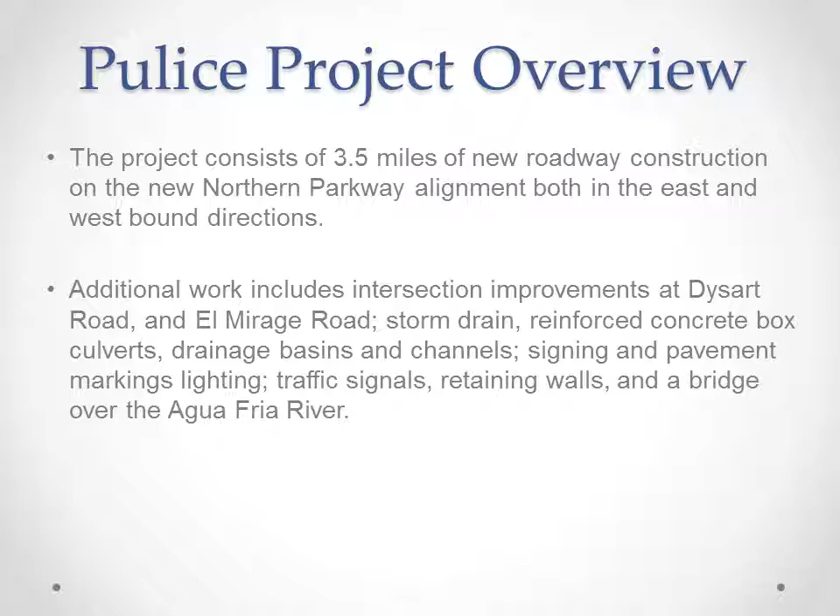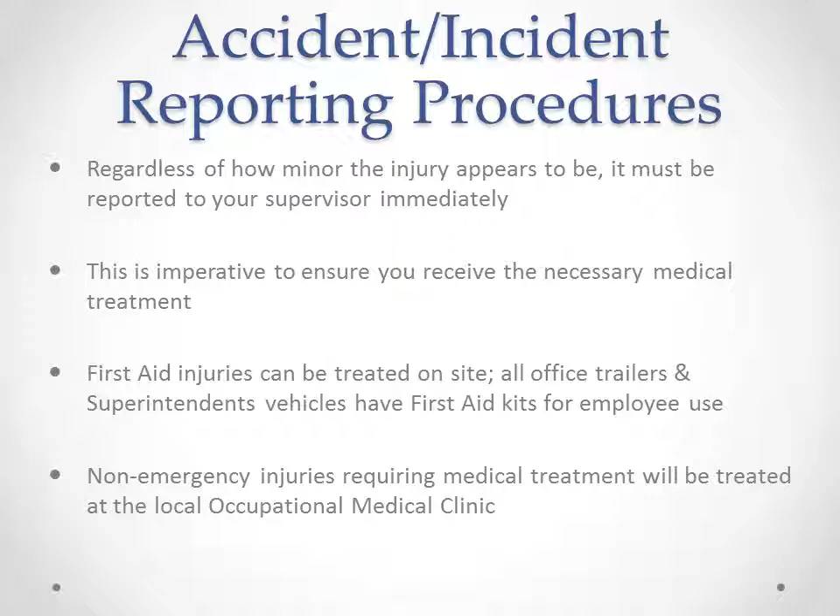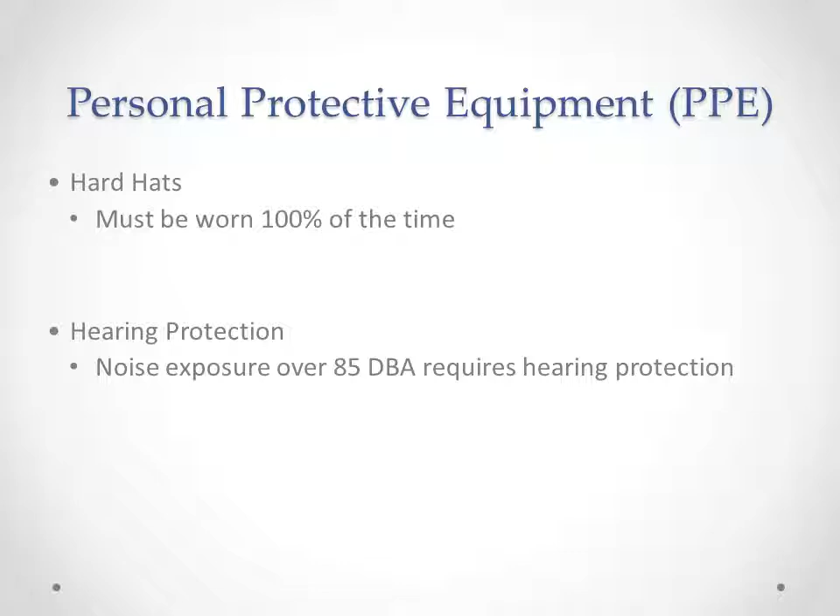Personal protective equipment. Hard hats must be worn 100% of the time. The only exception to this is while you are inside the enclosed cab of an equipment piece or inside a vehicle. Noise exposure over 85 dBA requires hearing protection. This is the level above which extended exposure will permanently damage your hearing. Most of the tools and equipment present on the sites operate at a volume over 85 dBA, so hearing protection is recommended when working with or around equipment and machinery.

Safety glasses must be worn at all times when a hazard is present. Many people end up with objects in their eye simply by being near tools being used, even if they aren't using the tools themselves. All eyewear must be Z87 approved. This includes prescription glasses. Z87 is the minimum protective standard required by OSHA. Side shields must be used with prescription glasses. In place of this, you must wear goggles over the glasses. If cutting or grinding, safety glasses must be used in addition to a safety face shield or a similar layer of protection.

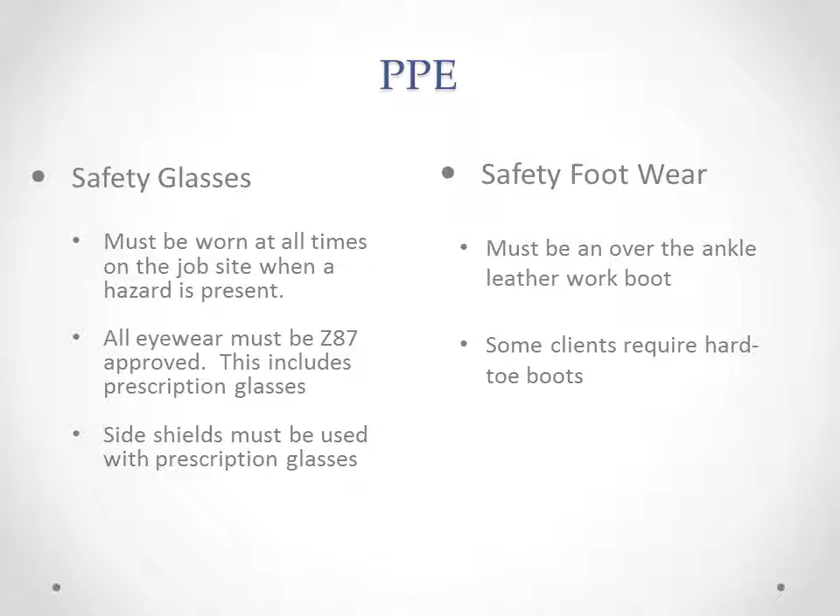Footwear must be an over-the-ankle leather work boot. We also require our employees to wear long pants and a shirt with a sleeve of at least 4 inches. Gloves are to be worn when handling material. It is important to select the proper glove for the job being performed. Vinyl or rubber gloves are required for working with any hazardous chemical or chemically treated material.

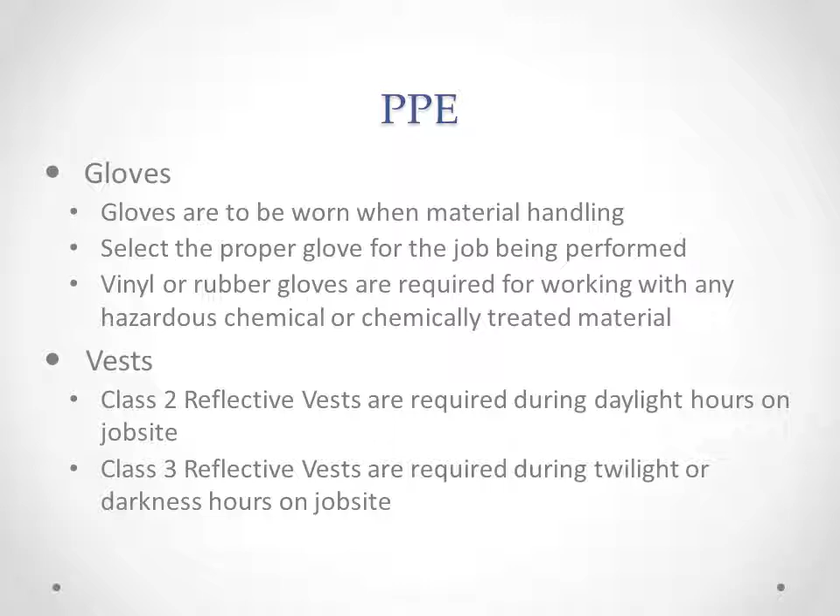Safety vests. Class 2 reflective vests are required during daylight hours on our job sites. Class 3 reflective vests are required during twilight or darkness hours on our job site.

Fire extinguisher safety. While performing hot work, a fire extinguisher must be readily accessible. Please note some jobs may require hot work permits. Inspect fire extinguisher before each use. All our fire extinguishers are ABC type extinguishers and so are useful for a variety of fires. This is so you are able to use any extinguisher accessible rather than having to search for the right type. Verify the extinguisher has been inspected annually and for the current month with the documentation on the tag. If the fire is too large to handle yourself, sound the alarm and evacuate the area immediately.

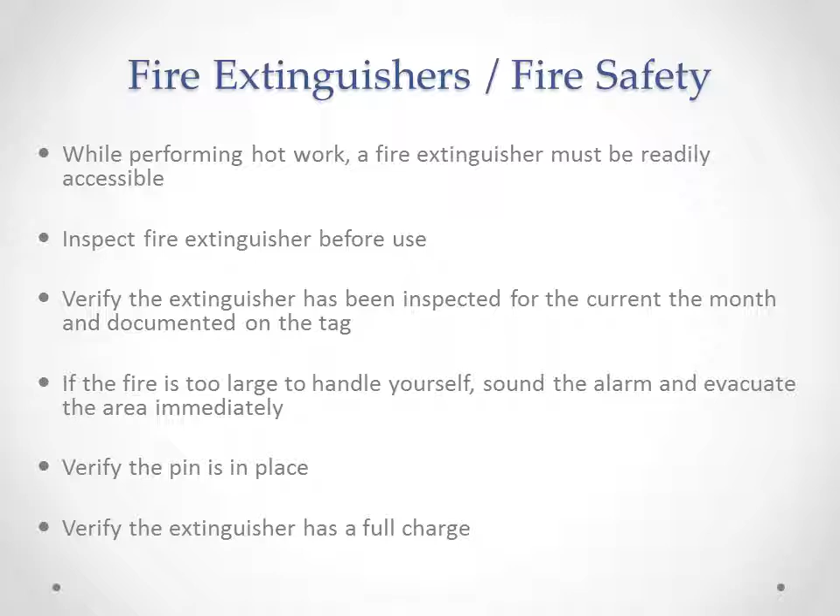Ladder safety. Ladders must be inspected before use daily. Do not use extension or step ladders with weakened, broken, or otherwise defective parts. Tag it out of service and remove from site. Check weight limitations of the ladder prior to use. Keep shoes free of mud and grease.

Never hand carry materials or tools up a ladder. Use a tag line to hoist them up. On equipment, place items on the step or fender above the ladder, then climb up. You must be able to maintain 3 points of contact at all times, including on ladders on equipment. Only one person at a time may work from a single ladder unless designed otherwise.

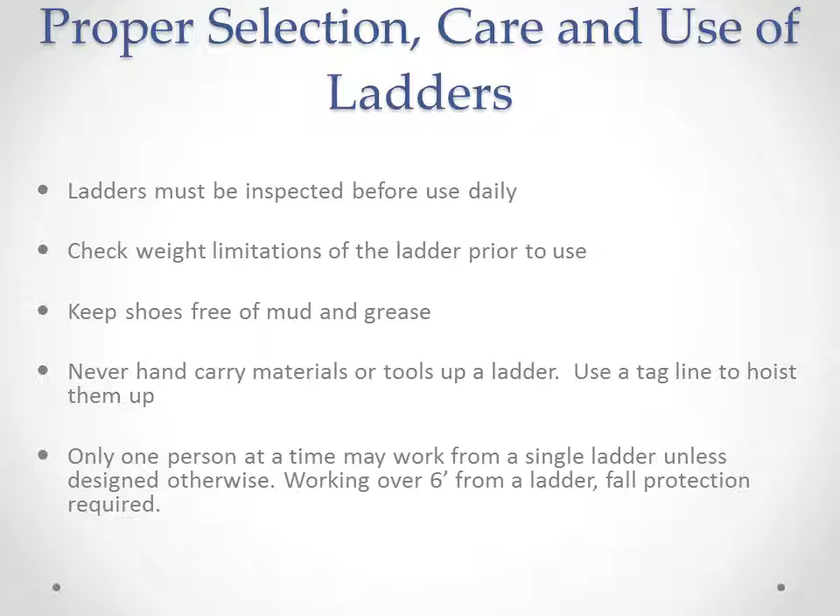Working over 6 feet from a ladder, fall protection is required. Wood job-built ladders need to have documented inspections daily. Step ladders should be fully open and the cross braces locked in place. Step ladders shall not be used when leaned up against an object. The ladder must be completely opened up. Keep the area around the base of the ladder free of clutter and materials.

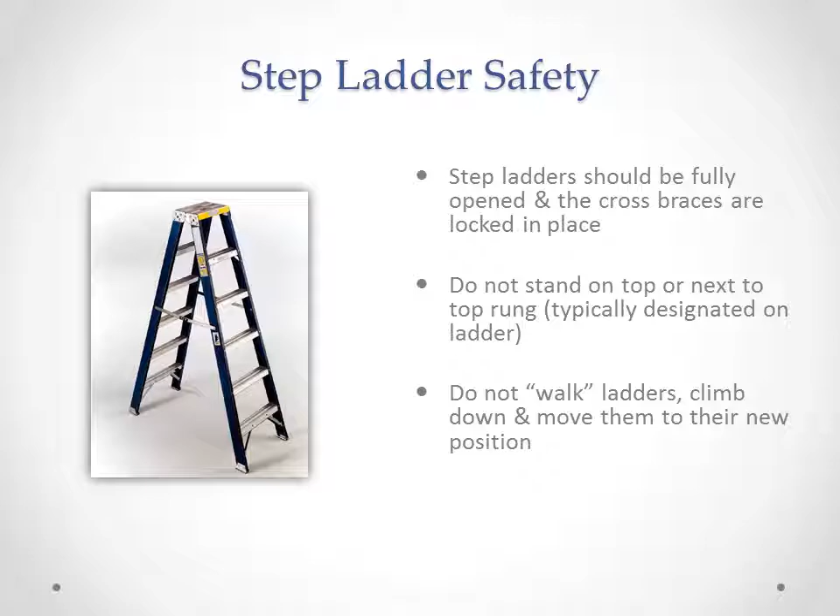Do not stand on the top or next to top rung, typically designated on the ladder. Do not walk ladders; climb down and move them to their new position. Walking ladders can warp the frame and reduce the structural integrity and the weight capacity of the ladder.

Set up extension ladders at a 4-to-1 rise to run angle. If the wall is 16 feet high, the bottom of the ladder needs to be 4 feet out from the base of the wall. Secure ladders at the top and bottom. If the ladder is in a trench, bracing the base of the ladder against the other wall of the trench is acceptable as securing it. The top of the ladder should extend a minimum of 3 feet above the ladder's landing.

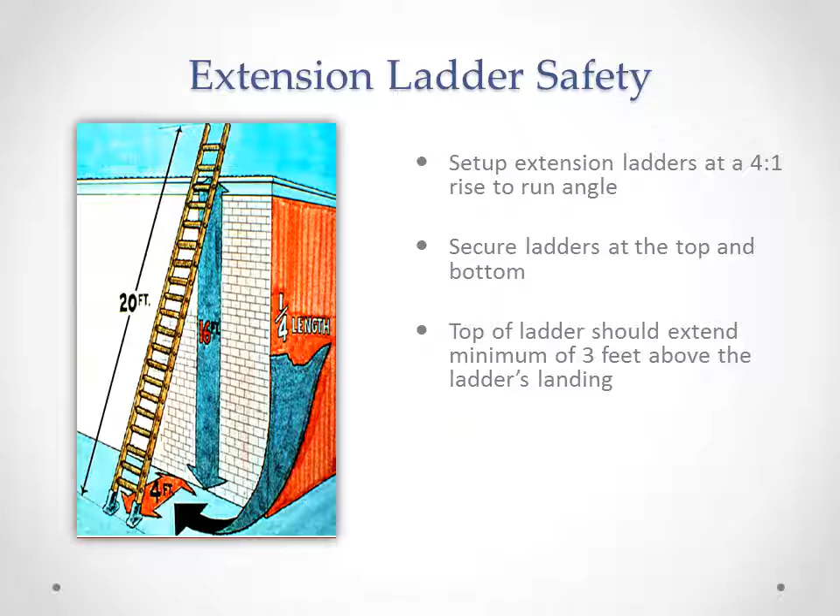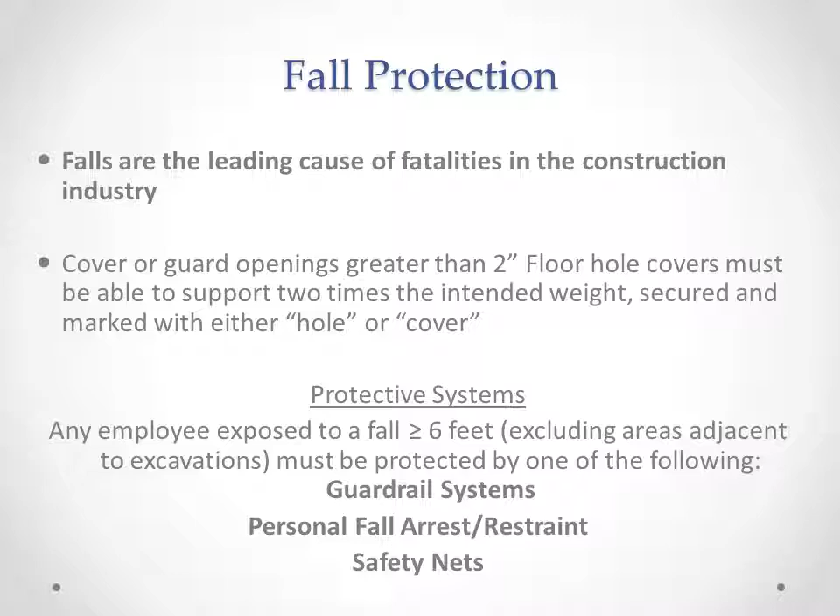Fall protection safety. Falls are the leading cause of fatalities in the construction industry. Cover or guard openings greater than 2 inches. Floor hole covers must be able to support 2 times the intended weight, be secured, and marked with either 'hole' or 'cover'. Any employee exposed to a fall greater than 6 feet must be protected by one of the following: guardrail systems, personal fall arrest, restraint systems, or safety nets.

Preventing back injuries. Back injuries are one of the leading injuries in the construction industry, and most of them are easily preventable by using proper planning and technique. It's important to remember to never lift items that are too heavy or too awkward. Always get help and have a plan before you lift. The proper positioning and technique that will save your back from injury is as follows: keep your knees bent and your back straight, keep the load close, and do not twist.

Rigging inspection. Only use properly rated rigging equipment. In the case of chains, only grade 80 and grade 100 are to be used for lifting. Anything less is a transport chain, useful only for tying things down, not for lifting. Inspect all rigging prior to use for damage and wear. Look for cracked, stretched, or bent links on the chains. Ensure the manufacturer's tag is still in place. If rigging equipment is damaged or faulty, or if the manufacturer's tag is gone, remove it from service immediately.

In the case of synthetic or nylon slings, look for acid or caustic burns, melting or charring of any parts, snags, punctures, tears, or cuts, broken or worn stitches, and distortion of fittings. If any of these are present, remove the sling from service.

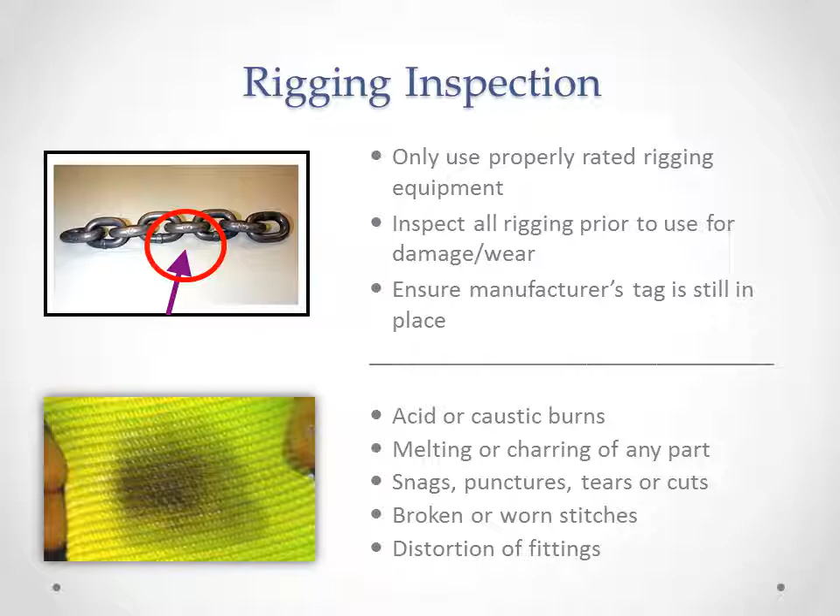When using slings, protect them from sharp edges of the load by placing pads over the sharp edges. Do not place your hands between the sling and its load when the sling is being tightened around the load. Ensure that the sling is appropriately rated for the weight of the load. When rigging with a synthetic sling, always put the tag towards the hook so the tag can still be read.

Hazard communication. Any and all chemicals brought onto our job sites must be labeled, inventoried, and the SDSs given to the project management team prior to being brought on site. It is your right to understand what chemical materials you are working with. You should know the location of the Safety Data Sheets book and the written HAZCOM program. All of the job site trailers contain SDS books and the information for 3E Company, the third-party SDS provider.

Information and training shall be received any time a new hazardous chemical is introduced into your work area. Always check containers for labels, and remember that secondary containers must be labeled with the chemical name and hazards. As of June 1, 2015, new HAZCOM GHS standards require all containers to have new labels and SDS sheets.

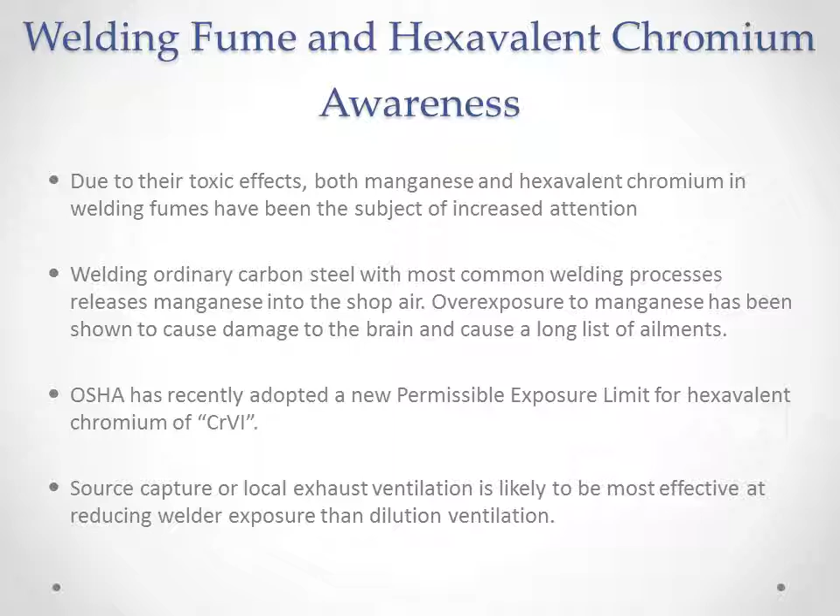Welding awareness. Due to their toxic effects, both manganese and hexavalent chromium in welding fumes have been the subject of increased attention. Welding ordinary carbon steel with the most common welding processes releases manganese into the shop air. Overexposure to manganese has been shown to cause damage to the brain and a long list of ailments. OSHA has recently adopted a new permissible exposure limit for hexavalent chromium. Source capture or local exhaust ventilation is likely the most effective method for reducing welder exposure, more so than dilution ventilation.

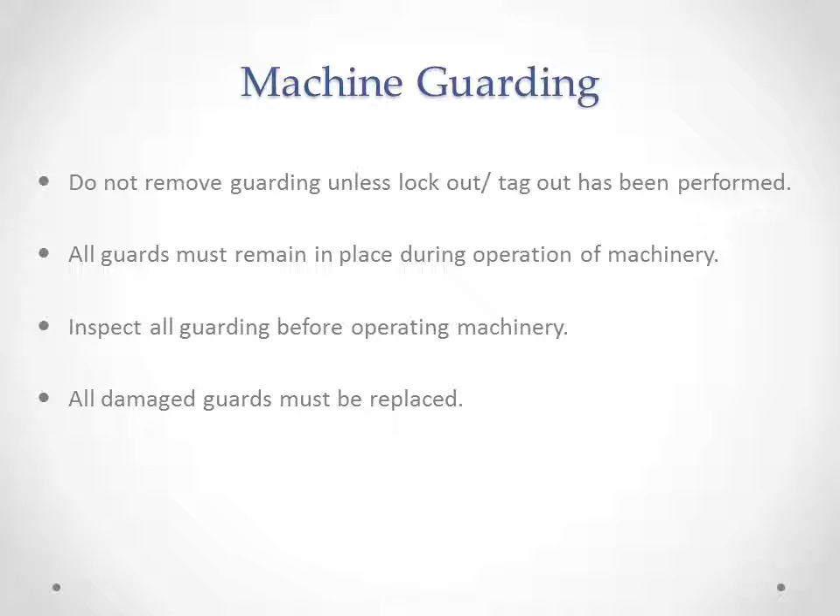Machine guarding: do not remove guarding unless lockout-tagout has been performed. All guards must remain in place during the operation of machinery. Inspect all guarding before operating machinery. All damaged guarding must be replaced. Machinery or equipment cannot be operated if guards or other safety devices are broken or missing. If this is the case, the machinery or equipment is required to be tagged out until the device or guard is fixed and returned.

Lockout-tagout procedures are used to prevent the release of hazardous energy or to prevent hazardous energy from escaping. A padlock is placed on the appropriate energy isolating device that is in the off or closed position.

Lockout-tagout addresses the fatal five main causes of workplace injuries: failure to stop equipment, failure to disconnect from power source, failure to dissipate residual energy, accidental restarting of equipment, and failure to clear work areas before restarting.

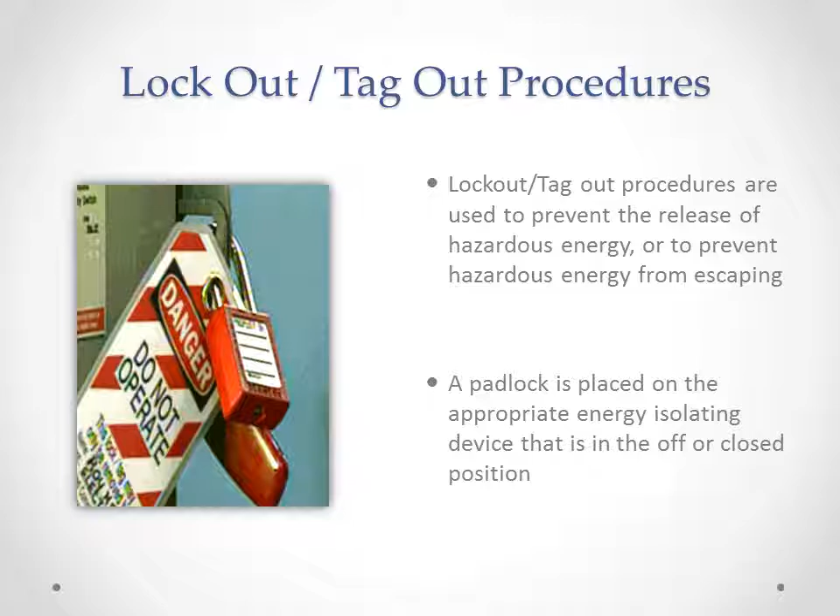Never loan or share your lock or key with anyone else. Always be sure all lockout-tagout devices are compatible with the environment in which they will be used. For example, do not use a paper tag somewhere it will be exposed to the weather.

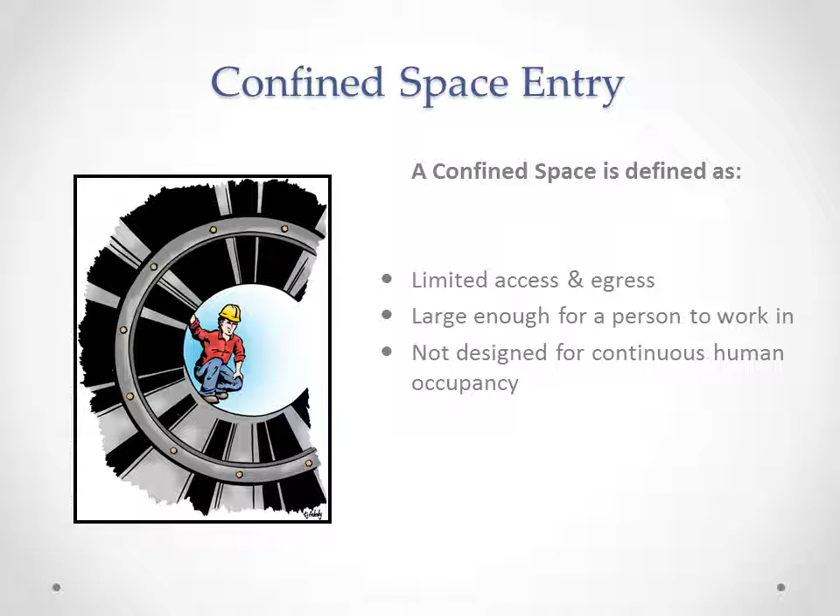Confined space entry: a confined space is defined as having limited access and egress, being large enough for a person to work in, and not designed for continuous human occupancy. Some examples of confined spaces are tanks, vaults, manholes, and pits.

A confined space is considered permit-required if any of the following are true: it contains or has the potential to contain a hazardous atmosphere; it contains a material that has the potential for engulfing an entrant; it has an internal configuration such that an entrant could be trapped or asphyxiated by inwardly converging walls or by a floor which slopes downward and tapers to a smaller cross-section; or it contains any other recognized serious safety or health hazards.

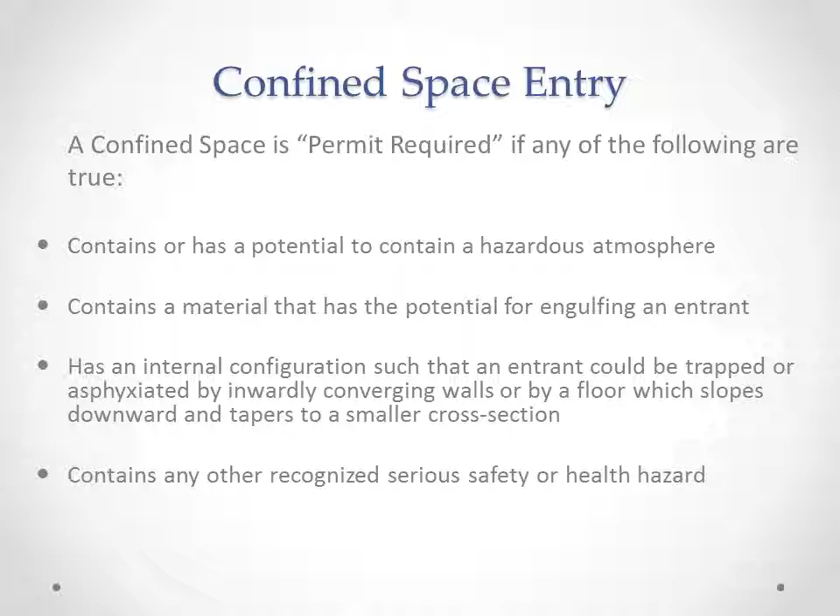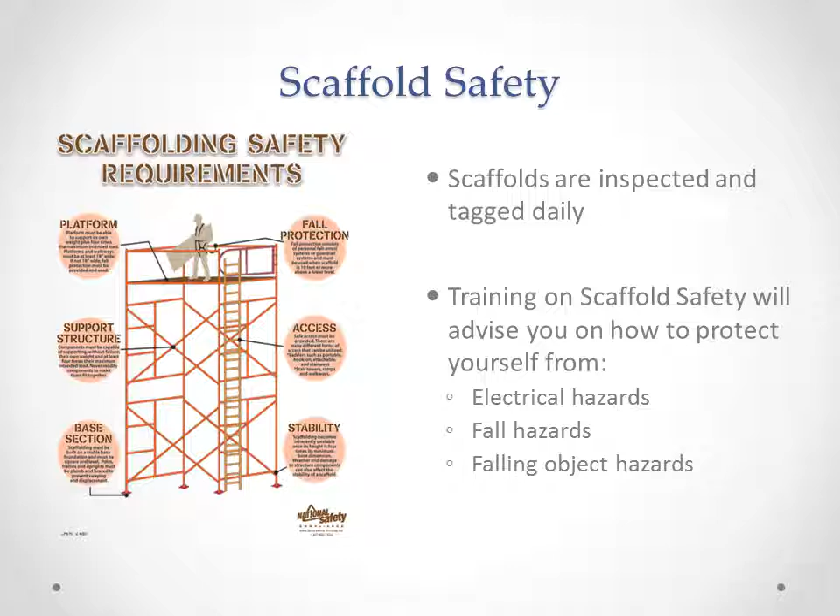Scaffold safety: scaffolds must be inspected and tagged daily by a competent person. Green indicates all clear. Yellow indicates that hazards are present - recognize those hazards and proceed with caution. Red means no entry. Training on scaffold safety will advise you on how to protect yourself from electrical hazards, fall hazards, and falling object hazards. Never change scaffold configuration.

Employees must be protected from falling hand tools, debris, and other small objects. Protection is gained through the installation of toe boards, screens, guardrail systems, debris nets, catch platforms, canopy platforms, and canopy structures that contain or deflect falling objects, as well as roping off or blocking off areas underneath scaffolding. This represents an example of why a scaffold might have red tape.

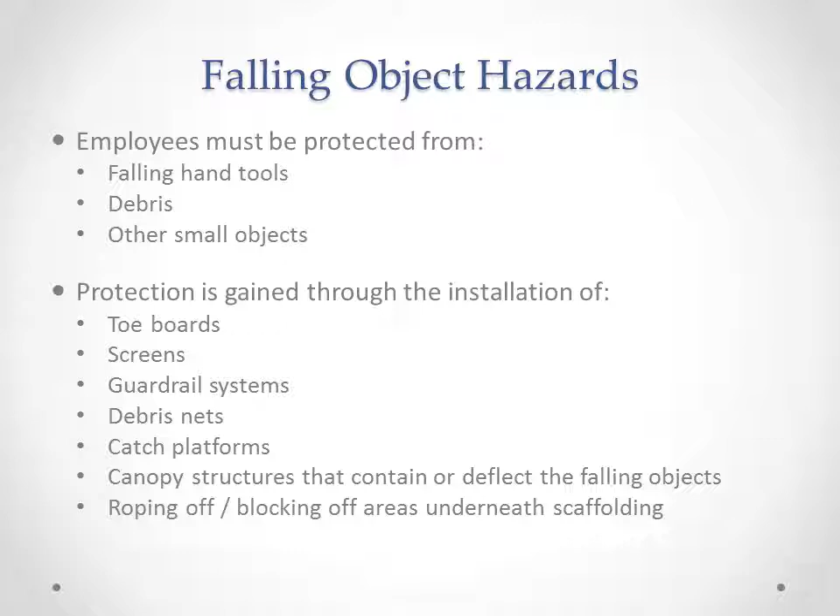Heavy equipment safety: all heavy equipment has the right of way on our projects. Be aware of traffic patterns before entering or parking on any of our projects. Never operate equipment without proper training. Seatbelts must be worn at all times. Maintain eye contact with all workers on the ground. Complete daily equipment inspections - check backup alarms, glass, mirrors, and guards, and notify the supervisor of any defects needing repair.

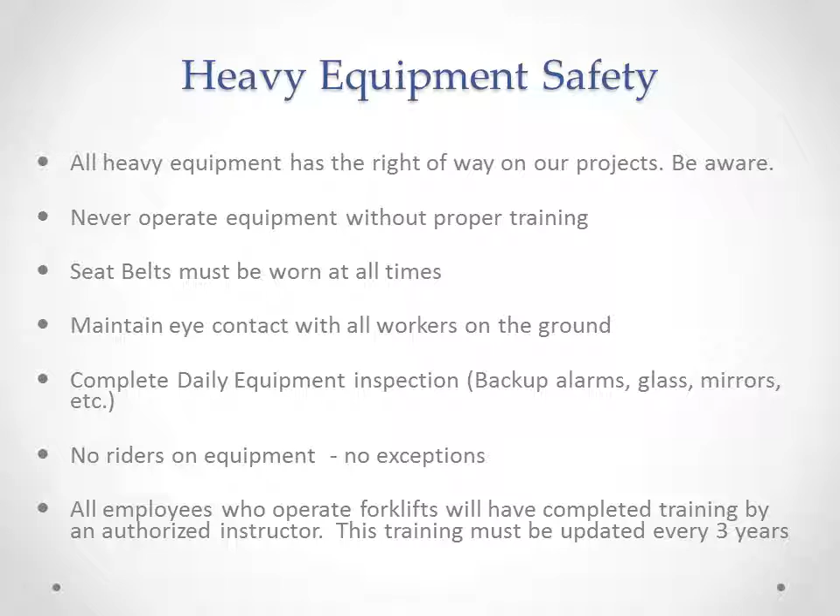Maintain 3 points of contact on ladders while entering and exiting equipment. No riders on equipment - there are no exceptions. All employees who operate forklifts will have completed training by an authorized instructor. This training must be updated every 3 years.

Crane safety: cranes are very important and very dangerous. Be aware of all working cranes on the projects.

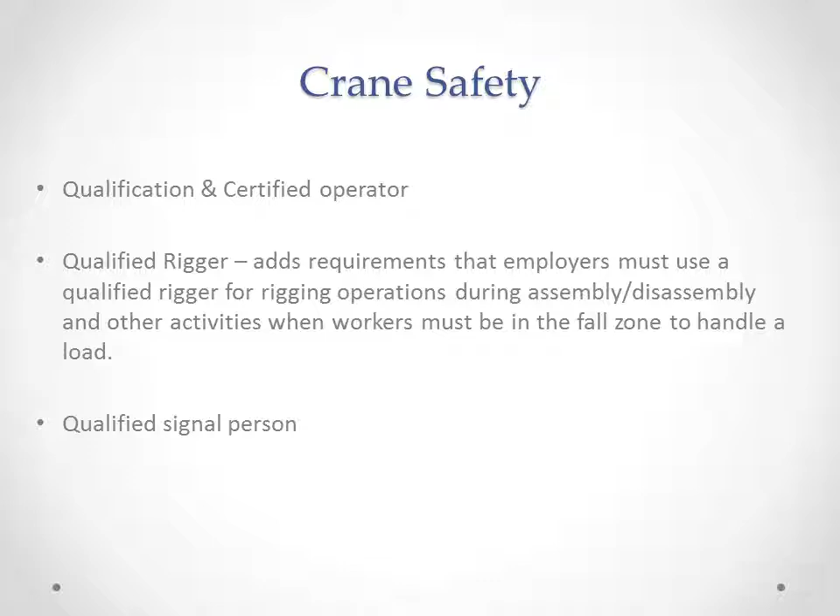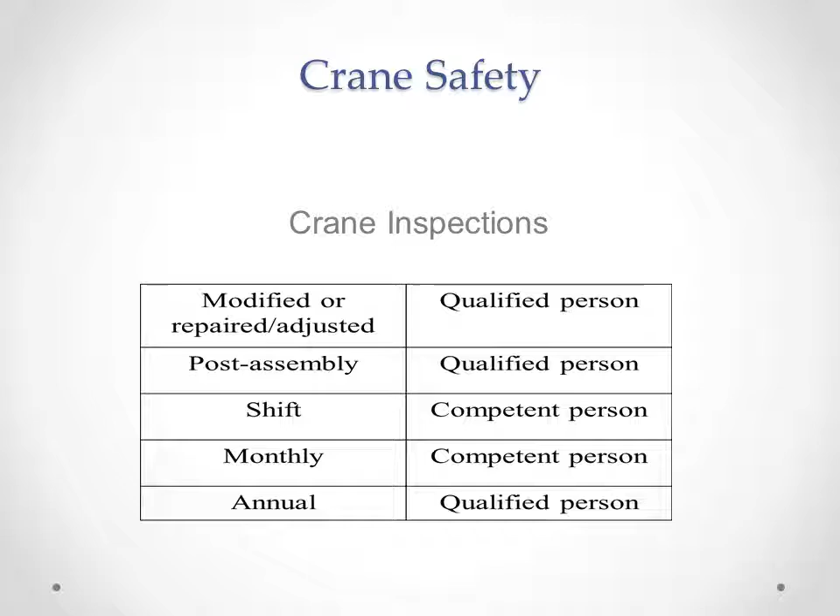Crane operator needs to have current certification. There must be a qualified rigger and a qualified signal person while the crane is in operation. Cranes shall be inspected prior to every shift and also on a monthly and yearly basis. Annual inspections are to be completed by a qualified person or when modified, repaired, and adjusted.

Critical lift guidelines. A critical lift is defined as one of the following: when a man basket is used, when using 2 cranes for a lift, when weight exceeds 75% of the load chart, or when damage could result in serious economic consequences or delay in schedule.

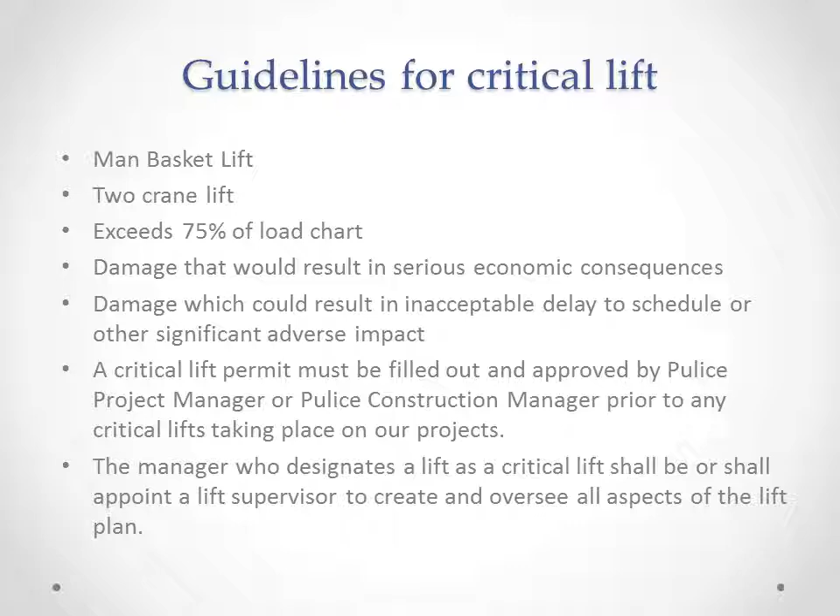A critical lift permit must be filled out and submitted to the project manager or construction manager for approval prior to any critical lifts taking place on our projects. The manager who designates a lift as a critical lift shall appoint a lift supervisor to create and oversee all aspects of the lift plan.

Trench safety. One of the serious exposures to injury is working in trenches. Prior to digging, ensure that all utilities are properly marked and located. This includes blue stake confirmation and potholing of utilities. Pothole utilities by hand or vacuum truck. It is not considered potholing if you use a backhoe or a track hoe.

Trenches will be inspected by the competent person daily, prior to work, and when conditions change. Means of access and egress is required when trench depth is 4 feet or greater. Employees shall not work more than 25 feet from the access egress point. This means an access point or ladder is required every 50 feet.

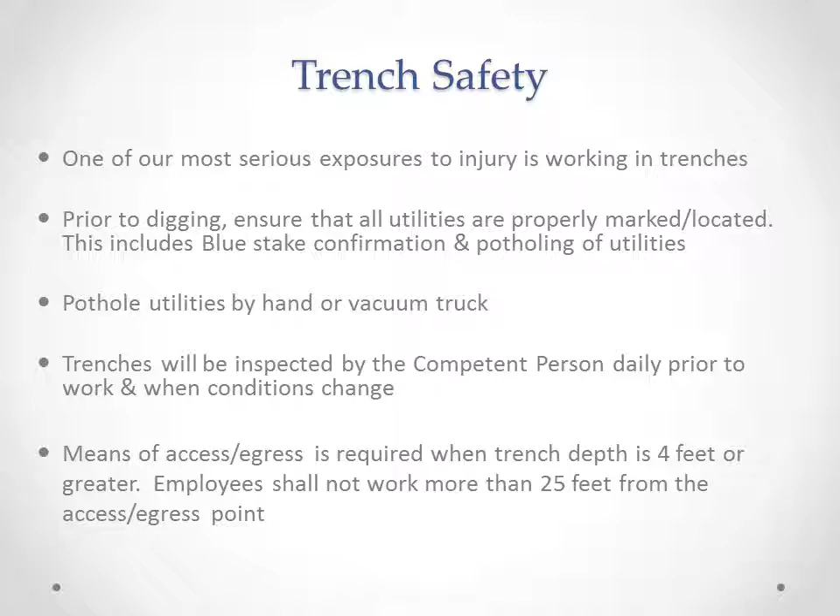Trenches greater than 5 feet in depth must be protected with one of the following protective systems: sloping, benching, shoring, or shielding. Different grades of soil require different amounts of sloping. The competent person will carry out testing to determine the soil type. Type A soils are to be sloped 3/4 to 1. Type B soils are to be sloped 1 to 1. Type C soils are to be sloped 1.5 to 1. Only Type A and Type B soils are permitted to be benched.

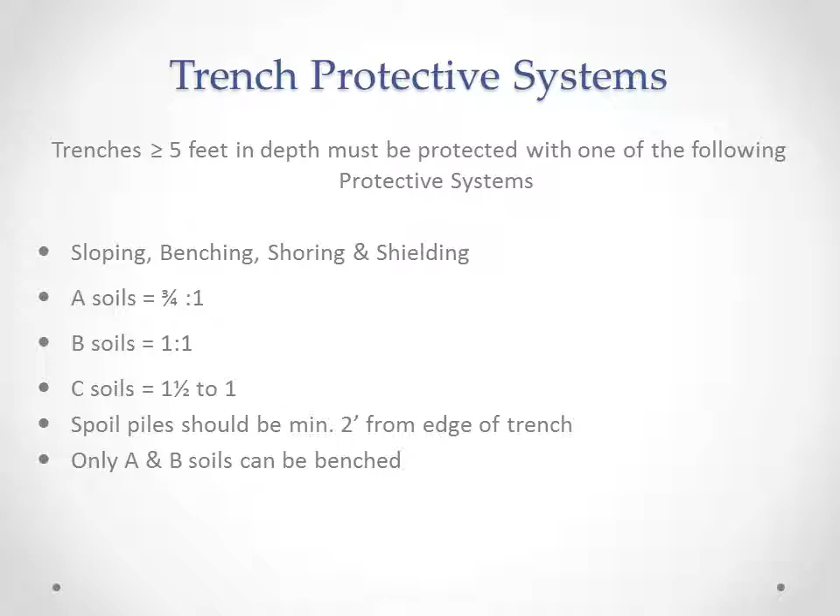Spoil piles should be at least 2 feet back from the edge of the trench. This 2-foot distance back from the edge applies to generators and tools as well.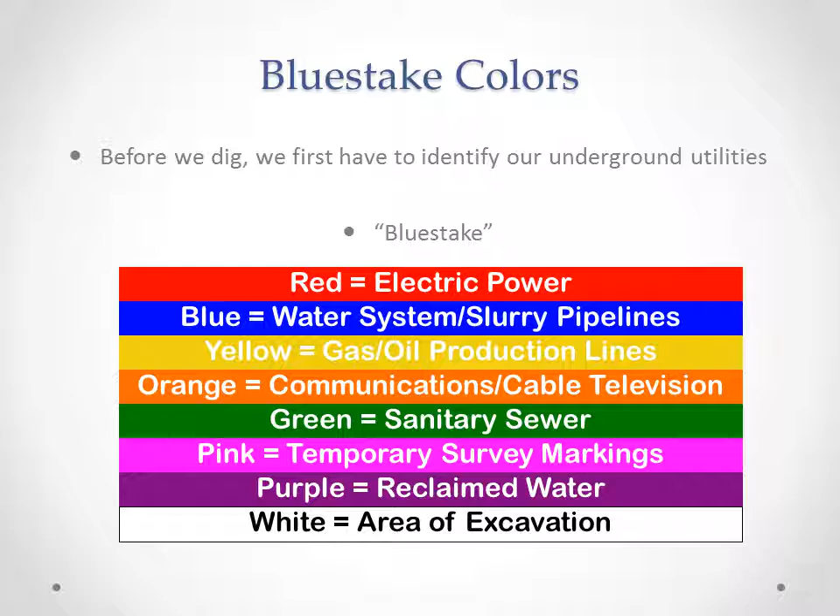Job safety analysis, or job hazard analysis, is required on all projects. JSAs or JHAs are an important part of our safety program and help in identifying hazards in the work area and the controls needed to complete our job safely. Hazard analysis is done prior to beginning work.

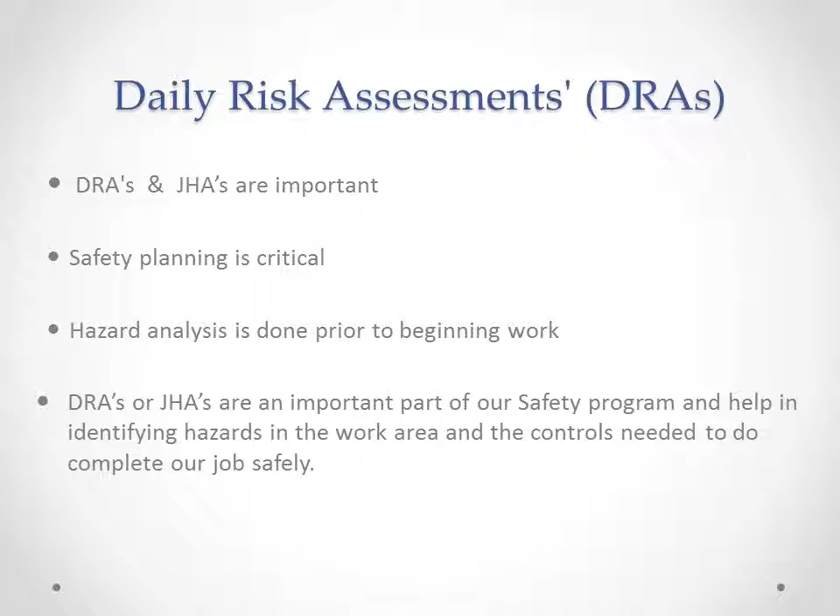Dust control is very important on all projects. Please check with your local environmental office for local regulations and requirements. In Arizona, the following apply: a certified dust control coordinator is required on all projects, and water pull and water truck operators must have completed the basic dust control training.

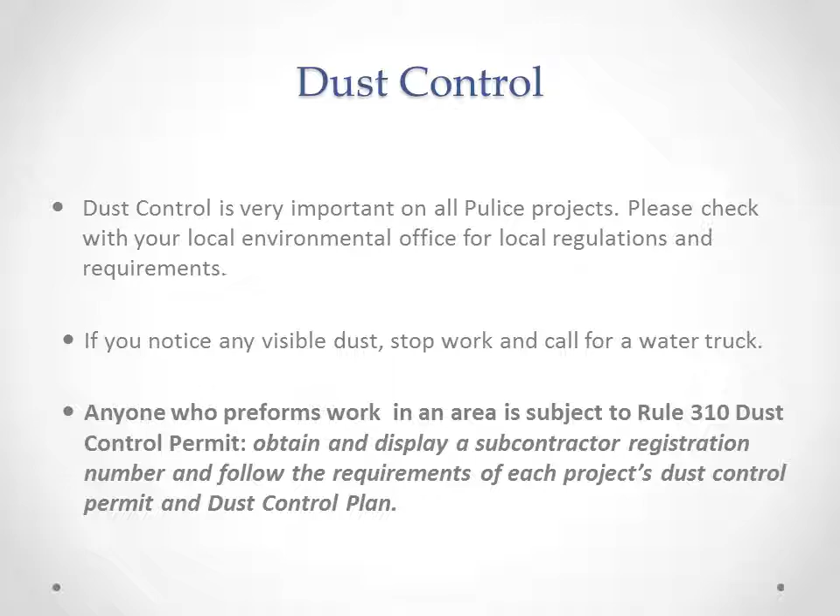Track out equal to or greater than a cumulative 50 feet, please clean up immediately. If you notice any visible dust, stop work and call for a water truck. Anyone who performs work in an area is subject to Rule 310 dust control permit. Obtain and display a subcontractor registration number and follow the requirements of each project's dust control permit and dust control plan.

Traffic control. It is everyone's responsibility to follow all traffic control measures on our job sites. Obey all traffic signs in the work zone, drive the speed posted, and know where to enter and exit lane closures.

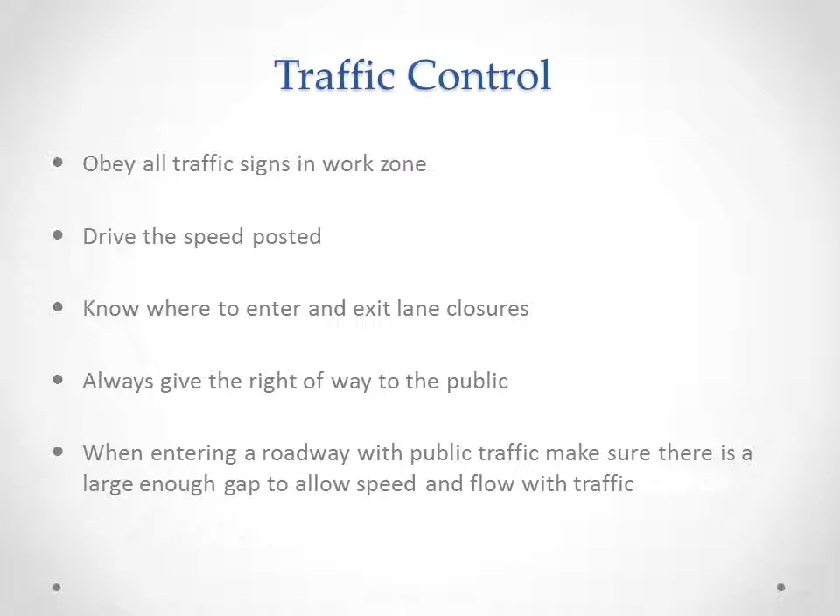Always give the right of way to public traffic. When entering a roadway with public traffic, make sure there is a large enough gap to allow speed and flow with the traffic. If you notice traffic control devices or barricades that are knocked down, please notify project supervision immediately.

When working behind concrete barriers, do not sit, lean, or stand next to them. Do not park personal vehicles in a work zone. Use strobes and beacons when entering or exiting the work zone. Barricades and signs are there to protect you, so do not move or alter barricades and signs.